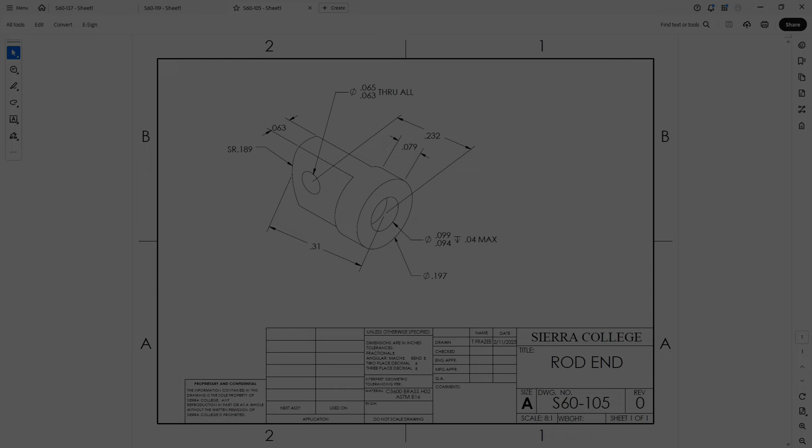This is the video tutorial for the S60-105 rod end. Okay, this part is actually a little more complicated than you see at first glance. If you see this SR here, that's a spherical radius. So that is not just a straight radius cut. It's kind of hard to tell from this isometric, but it has a dome on it, and then this is curved more than it would be if it was just a straight radius cut.

Because of that, we need to make our base feature as a revolve. You could make it in another form, but then you're still going to have to do a revolve cut on the top to get the geometry correct. Okay, so let's start on this. We're going to make our revolve, and it's going to be just the profile of the part as if we were looking at it normal or 90 degrees to this flat face here. Okay, so let's do it.

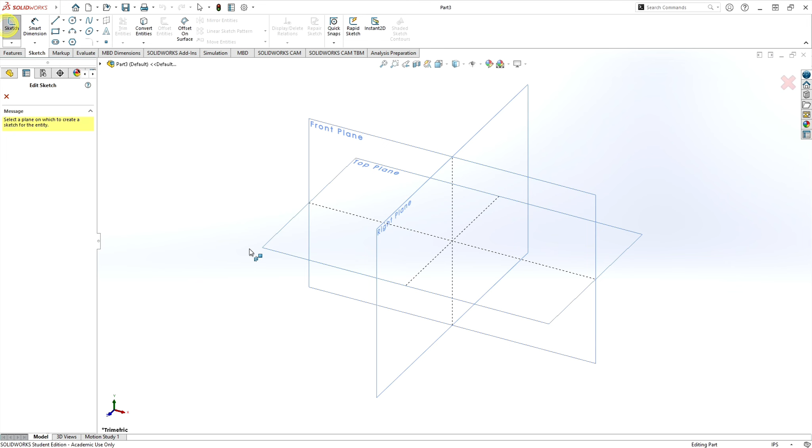Okay, we're going to go to SolidWorks. We're going to create a new part file. Okay, we're going to sketch on our front plane. I'm going to do it in the same orientation as what we saw in the ISO. So I'm going to create my center line first. Go left to right. Hit escape. Click on your center line. Let's make it infinitely long.

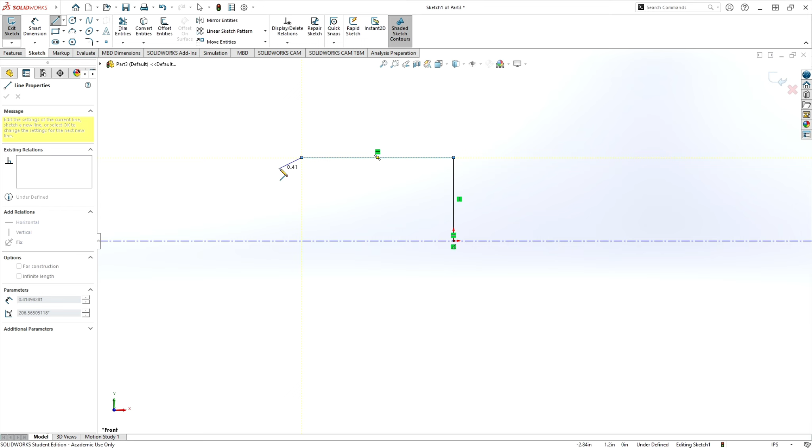And then we're going to draw a line. So we have a line. We're going to go up to the left. We're going to go left. Then we're going to go back. We're going to create an arc. And then we're going to click to where it's a half arc. Let's stop there. For this particular shape, if we look at our drawing, the arc is not tangent to this horizontal line. So we want to highlight the tangency if you automatically got one and delete that relationship. This will allow us to move this arc out of tangency, which is the way it really is.

Okay, now we're going to set up a relationship between the center of the arc and, hold the shift key down, the center line, and we're going to make those coincident. Now it looks like my center line didn't end up being aligned with origin like I had thought. I must have selected just a little bit off, but we're going to fix that right now. So I'm going to highlight the center line, highlight origin, and we're going to make those coincident. Okay, so if you did it right, you shouldn't have to do that step.

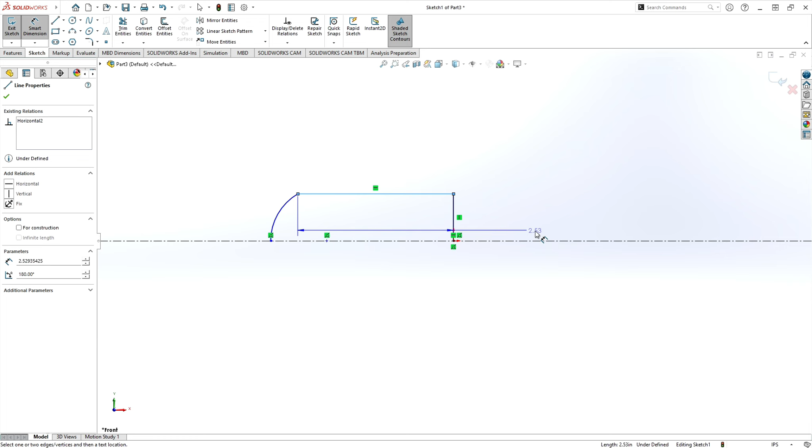Okay, now we're going to drag this arc back to the center line until it connects with it. So now we have a result that's similar to the profile of our part. Okay, it's got this large arc that is non-tangent, but it terminates on center line. Now we just need to throw dimensions on this. So our diameter for this shape is 197 thousandths. So we're going to pick our dimension tool. And once I drag, I got a radius, now I drag it down for a diameter, 0.179.

So that's 0.197, I transposed the number there. Okay, so then we've got our height. It's saying 2, but we need to move the tolerance to 3, so we see 197. Okay, we're going to accept that. Now we need to put our radius on this. So if we look at our drawing, it's a 189 spherical radius. It'll become spherical when we revolve it.

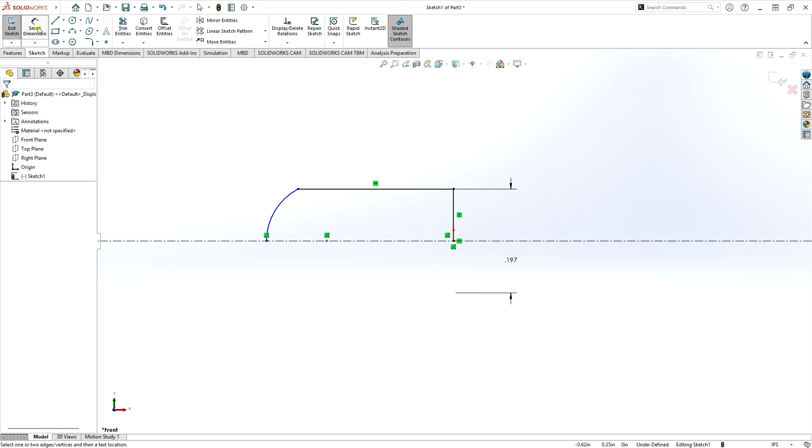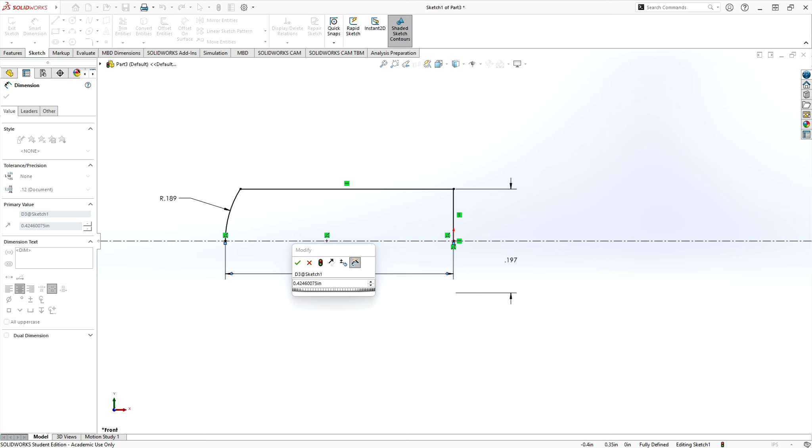.189. We're going to go to 3 decimal points. And we can drag this over so it's actually pointing at the arc. Okay. And our last dimension is the overall height. We're going to go from vertical line to endpoint, drag back, and our drawing says 310 thousandths to 2 decimal points. Okay, so then we've got our basic shape. We just need to do one last thing: we're going to go back and close our shape with one more line.

And that should be fully constrained because we have all the dimensions we need. Just make sure it doesn't have a negative symbol over here.

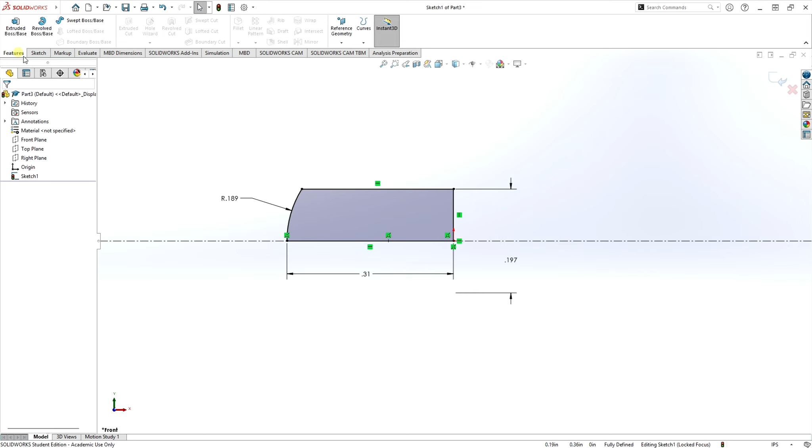Now we're going to go to features and we're going to go to a revolve base. We go to a 3D view and here's our shape. You notice how this has a dome to it in the preview. That's what we want. We're going to hit accept and we have our shape.

Okay, next, we have two flats on here we want to make. Now there's a bunch of ways you can do this. You could sketch on a plane on the end and cut down, or come in from a couple different angles. I'm going to show you a technique using the cut feature with an offset from the plane you're sketching on. That way we don't have to generate more planes.

So what we're going to do is sketch, and we're going to pull down on the feature tree over here, and we're going to sketch on the front plane on the middle of our part.

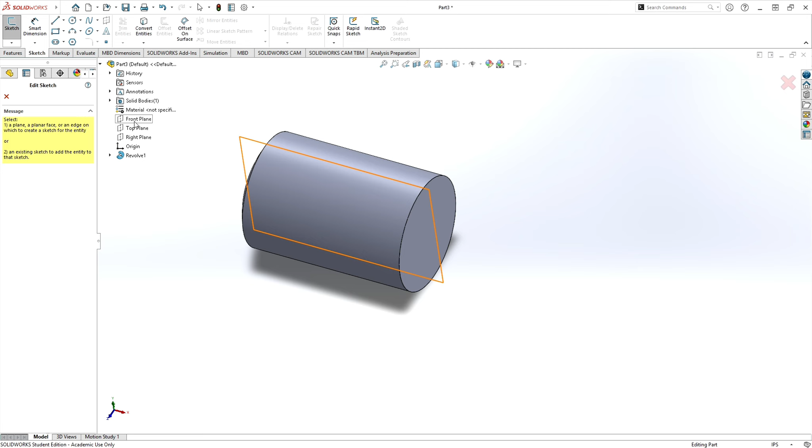We're going to select the silhouette, hold the shift key down, make sure it's just highlighting the lines, and we're going to highlight the silhouette all the way around. I'm not sure I got that one. Okay, so it should be really light blue. I don't know if you can see it in the rendering, but I've got the silhouette of three of the edges. Don't worry about the one on the right.

We're going to need to change that. We're going to go to Convert Entities, and it turns that into geometry.

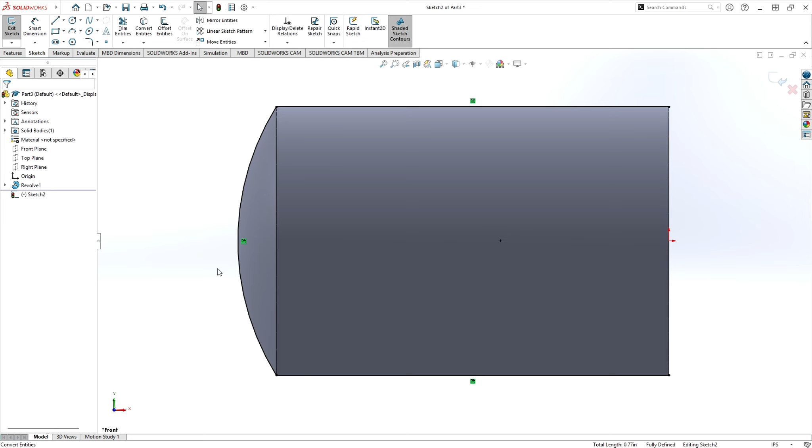We now need a vertical line running like so.

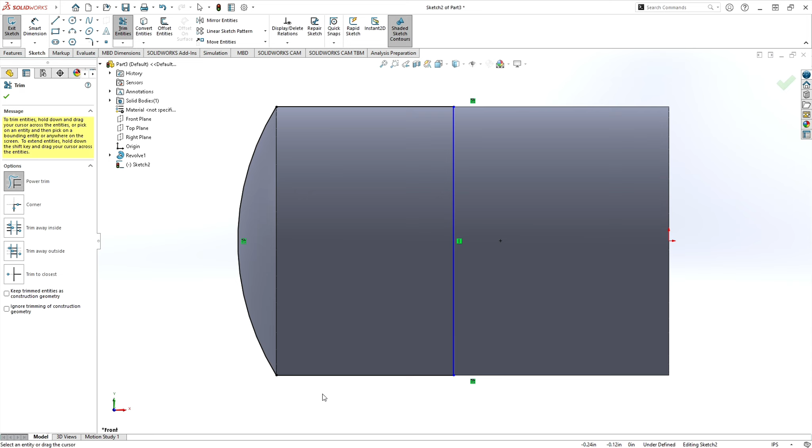And then we're going to use our power trim. We want to keep the part on the left because that's going to be where we're removing the material. So I'm going to drag across the tail here, down across that tail, down across that tail, and then that one. So these edges that I'm highlighting are already constrained to the model because they're model edges. And then this one isn't defined because right now I don't have a dimension defining how long this is.

Okay, so let's look at our drawing, and it is 79 thousandths from the bottom of the part.

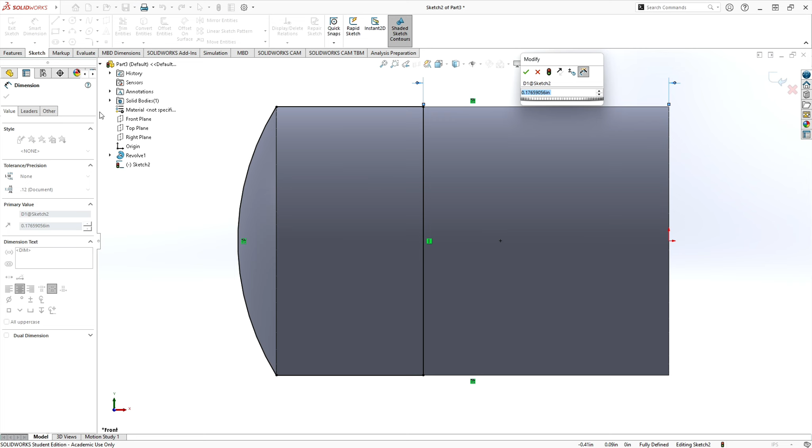So if I put a dimension in from the bottom of the part, or right side of the part, to the vertical line, 0.079. And then I'm going to switch this to 3 place decimals. I now have it displayed like it is on the isometric drawing. We're going to hit close that detail.

So now our sketch is fully constrained. Now if I look at this, I've drawn this right on center line. I don't want to cut all the way from the center line. I want to be able to cut offset from that.

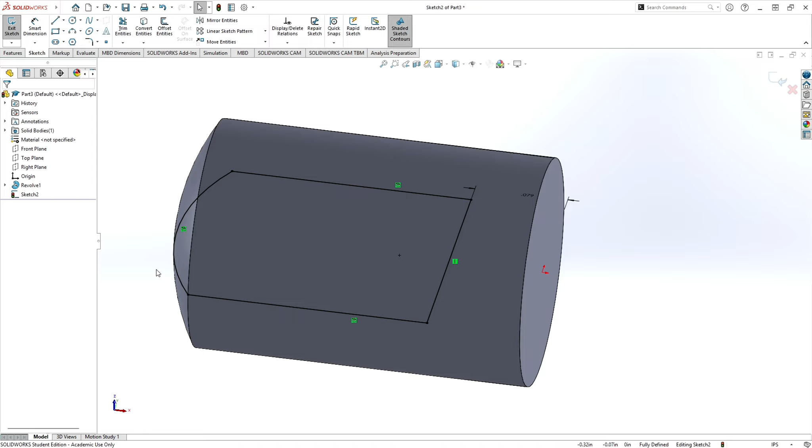Okay, we're going to go to features. We're going to do an extruded cut. Okay, it defaults to through all in both directions. We're going to go through all just in one direction. Wipe out all the material. We're going to go from an offset plane.

And that offset plane is going to be half the distance of the width of the rib that's going to be left behind. So if we go back to our drawing, the width of that is 63 thousandths, which is a 16th rounded up. So we're going to take half of that. So half of a 16th is a 32nd. 1 divided by 32.

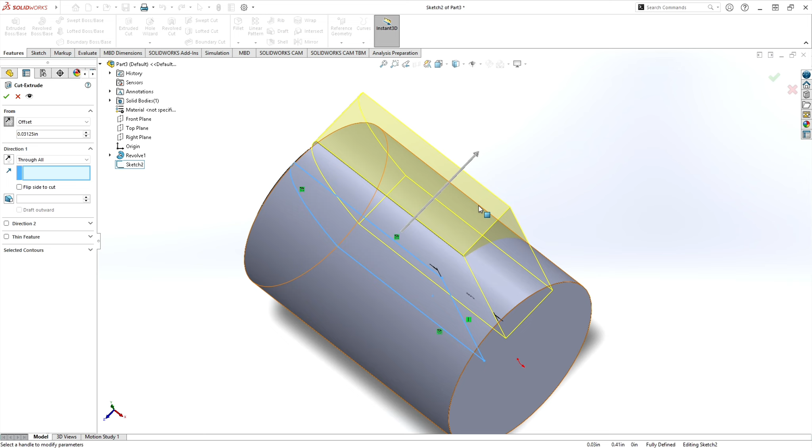And right now it's offsetting so that my cut is actually deeper. I don't want that. I want to go in the opposite direction. So I'm going to flip the direction of the offset to the opposite side of the plane. So the blue line represents center. The right line shows where our cut's going to start, and then it's going to cut out to infinity. So if I change the diameter of this, that cut will always leave the rib the same size. We're going to hit accept.

Okay, so I have half of my feature. I've got a rough feature. So I need to have this on the opposite side of the part. Well, the beauty of doing this off center line as my original reference is we can now use what's called a pattern.

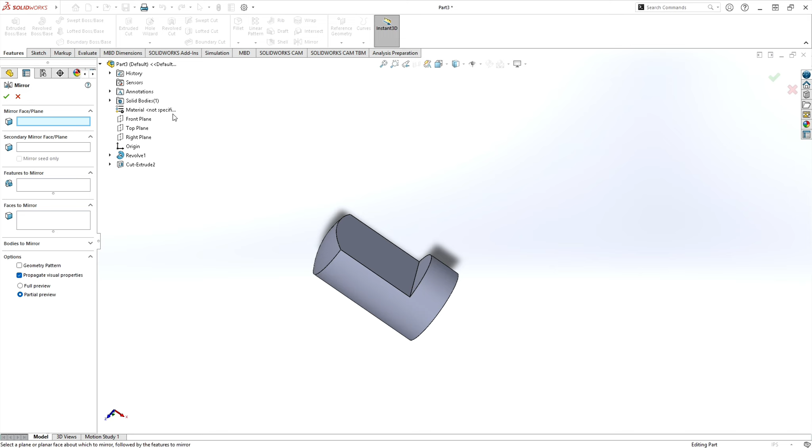So we're going to go to the pattern tools and we're going to use mirror. And we're mirroring the actual feature that we just made. Our mirror plane should be the same plane we drew our sketch on.

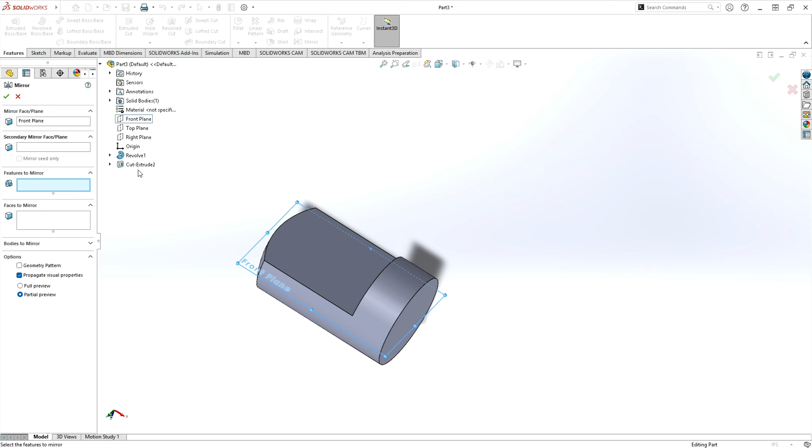With the front plane we are mirroring about, that should be on the center line of the part. We don't need any secondary, and we want to mirror a feature. So pick the box that says features to mirror, then select the cut we made, and it's going to mirror it on the other side of the part. Hit accept, and now we have a tang that should be the right size.

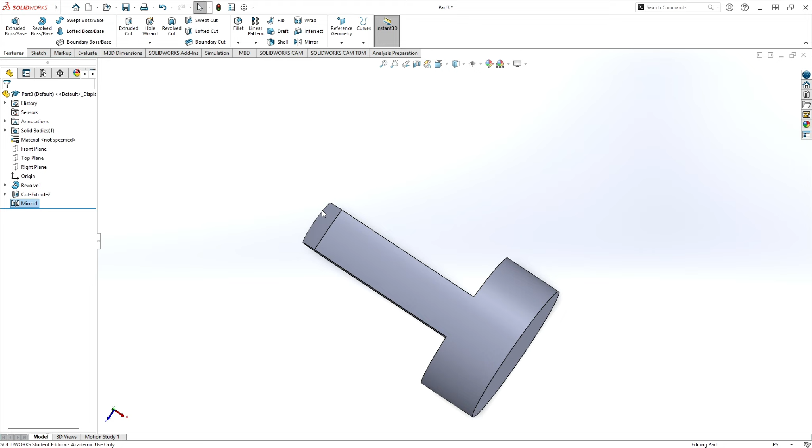It's parametric, and if you change it - look at this spherical dome on here, that's what we're looking for. All right, next step, we got a hole to put in here and a hole to put in the end.

Let's put the hole in the end. We're going to go to Hole Wizard. I'm going to use the simplified tool, simple drilled. So it puts the drill point in, leave it at 118 degrees, that's good.

Our tolerance, we want to set that at 3 place decimal. And then I'm doing the one on the end, so let's look at what our dimensions are. Okay, we got a 0.099 or 0.094 to 0.099, so halfway between that - let's get our calculator out again. 0.099 minus 0.094 gives us a 5/1000ths difference, divided by 2 is 2.5 thousandths. We're going to add that to the low of the tolerance, and that gives us this number, 0.0965.

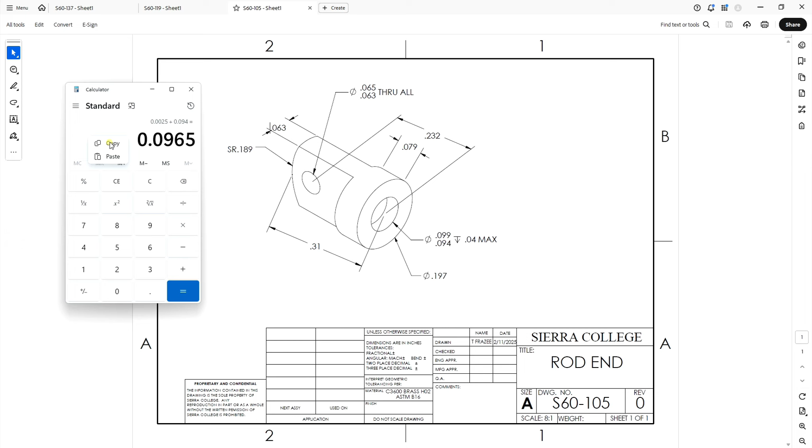Right click on your calculator to copy. Go back to our drawing, double click on the value we have and paste our diameter in. Okay, our end condition is not through all, it's going to be blind. And then our depth, according to our drawing, is 40 thousandths max.

And our tolerance is going to be a limit. We're going to put in 0.025 - sorry, 0.0025 in both. So we have 2.5 thousandths plus or minus.

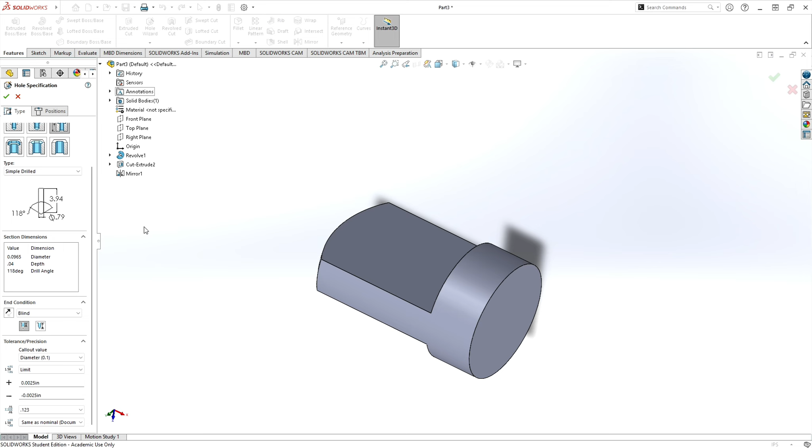Then we're going to go to positions. We're going to pick on the surface we want our hole in, pick where our location is, and hit accept. And we should have a hole with a drill point on it.

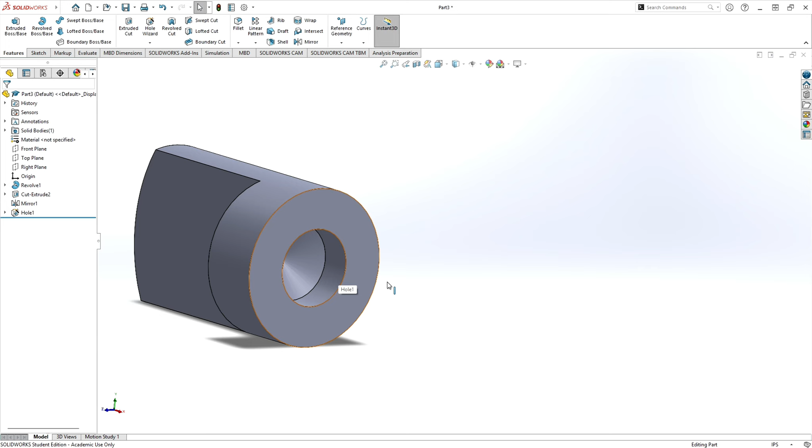Now we have questions about what is the depth - is the depth to shoulder here, or the depth that you put in to the end point of the drill? It is always to shoulder unless otherwise specified. I've seen it specified when they don't want a drill point to break through something, but yes, you're not going to go any deeper than 40 thousandths maximum to that shoulder.

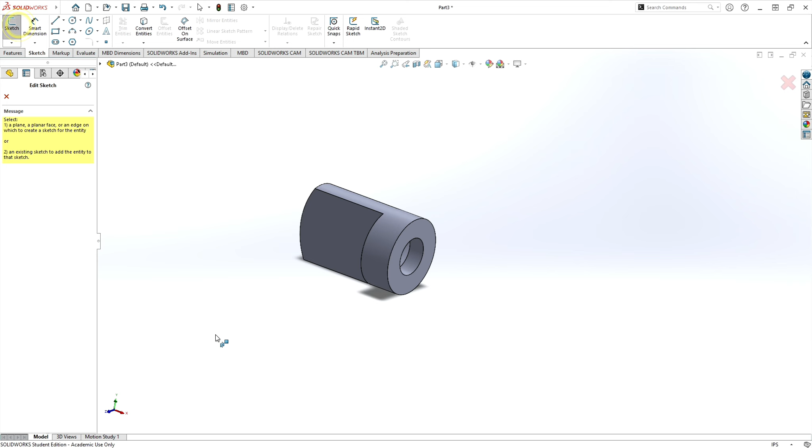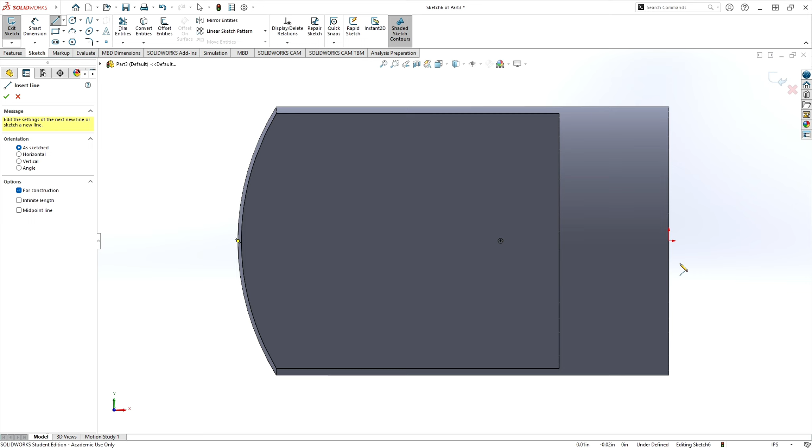So before we put this hole in, we need to make a preparatory sketch. I'm going to do a sketch on the face we want to put our hole in, and then do a line, a center line. According to our drawing, it is 232 thousandths from the base of the part. So we go from the base of the part, draw our line up, click, make sure it's horizontal - that'll put it on center line. Then we can just dimension this at 0.232, and this end point is in the correct place. We can then exit this sketch.

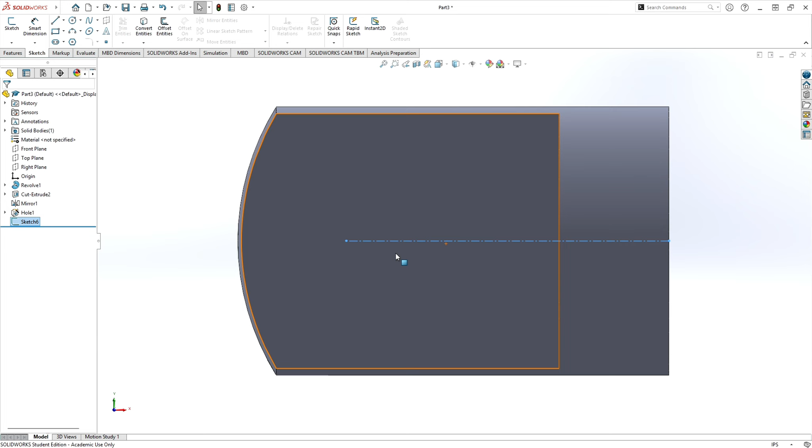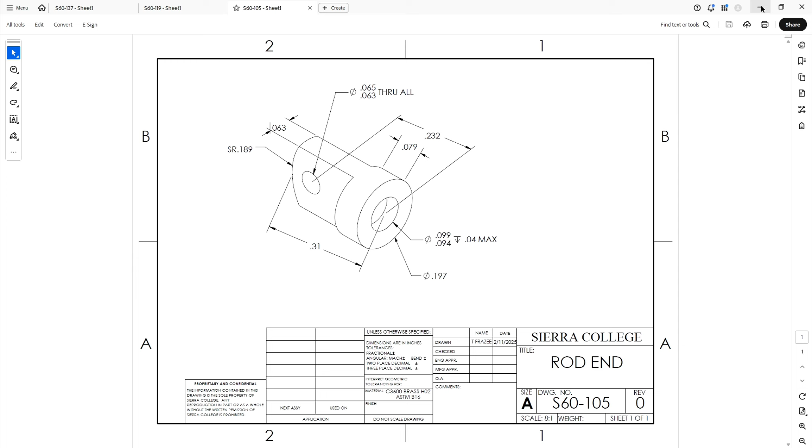And then we're going to go to Features, and go to the Hole Wizard. We're going to double click. Let's set our tolerance first - 3 place decimals. And our tolerance is 0.063 to 0.065, which halfway between those two numbers is 0.064 plus or minus 1. So we're going to put in 0.064.

Okay, and we're going to go through all this time. And then our tolerance is going to be a limit, and our tolerance should be 0.001 in both, plus or minus 1 thousandth. And then our dimension should be 3 place decimals as well.

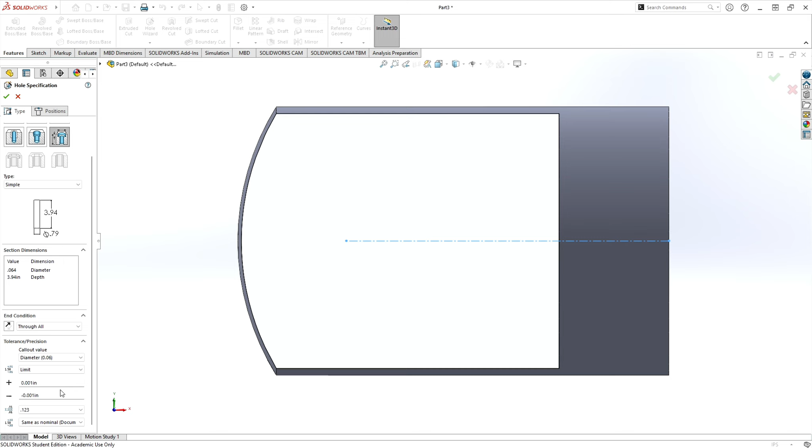Okay, we go to positions, and then we're gonna pick on the end of our center line, and then hit accept. And we should get our hole going through.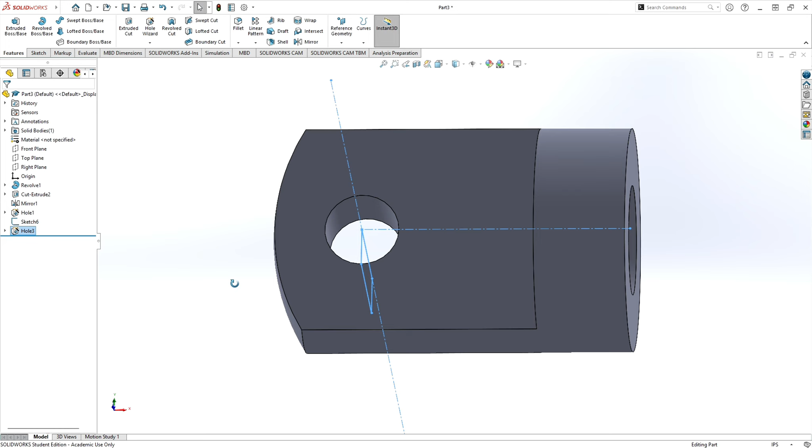Okay, if this sketch bothers you, you can always hide it. There we go. All right, so we've now modeled this part, and that concludes the tutorial for this. Of course, you're going to go and set your properties, set your material, make sure that all your sketches are fully constrained before you upload your file. Hope this is helpful, and I'll catch you on the next one.